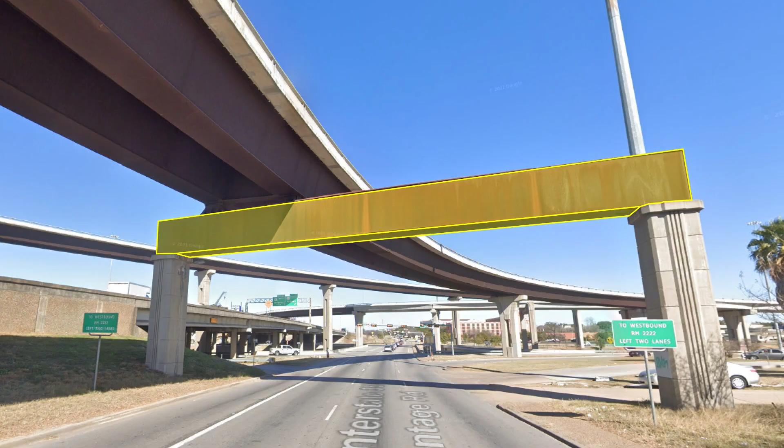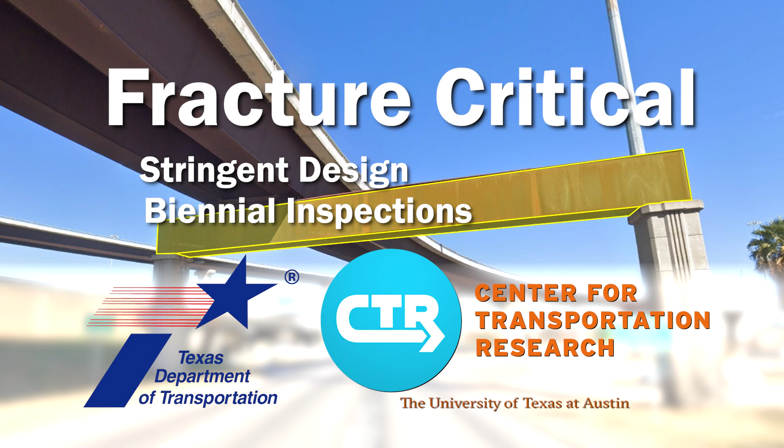Steel box straddle caps are categorized as fracture critical, meaning that they may require stringent designs and hands-on biennial inspections. Researchers at the Center for Transportation Research worked with TxDOT to develop a comprehensive design methodology to remove this fracture critical designation on the caps.

Straddle bents are supported by two columns on each side and are commonly used in congested urban environments. And steel straddle bents are fabricated by welding plates together to create a box. These types of structures are classified as non-redundant steel tension members, which require a federally mandated in-depth hands-on inspection every 2 years for the life of the structure.

Every 2 years, the state has to put a lot of money and time into investigating these. So what we were trying to do is develop details that gave us added redundancy in those systems and can then be labeled as we call them a non-fracture critical, but the term we use now is related more to whether it's a redundant member.

And that's what we were able to do in our research, is look at different details that we can use on these steel box straddle caps to try to get that redundancy in the system and thereby give a much more efficient structural system from the long-term maintenance perspective. Nationally, there's been a lot of research on non-redundant steel tension member bridges, but there was not any research on developing these types of redundant details for straddle bents.

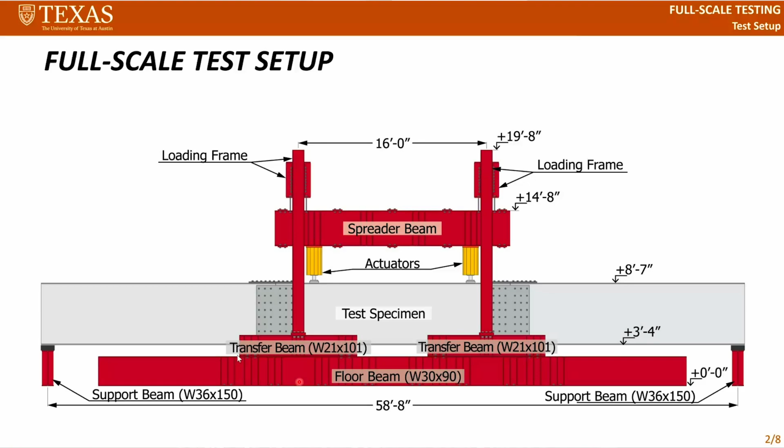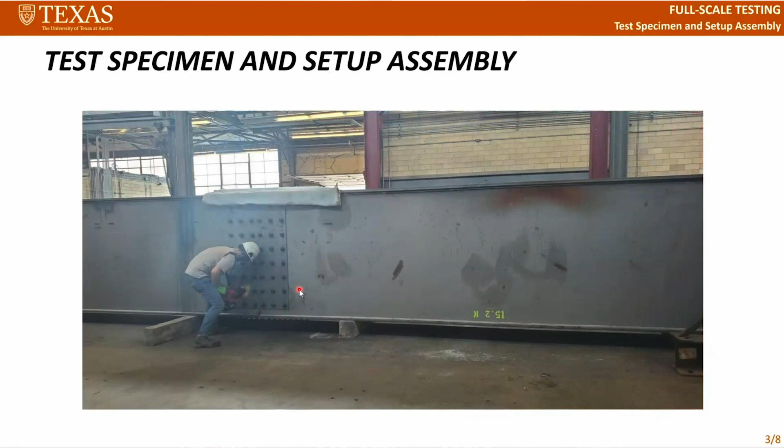These were what we call full-scale laboratory tests, and we also did parametric finite element analyses to then develop design methodologies. But the laboratory tests were somewhat unique in that they were full-scale steel box straddle caps. But we wanted to simulate a brittle fracture on these. Steel is a very ductile material, but in order to get it to behave in a brittle fashion, we can cool it down. And what we do is use liquid nitrogen to do that.

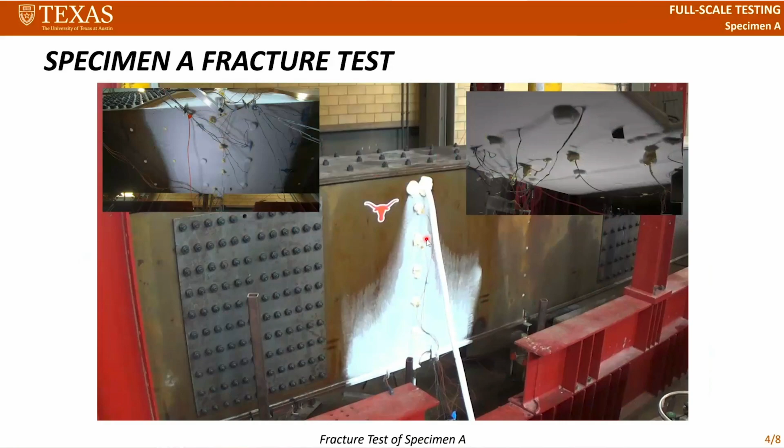So we were able to cool down the steel box caps in a region where we introduced a defect, by grinding a defect in, cycling it to grow what we call a fatigue crack. Then we cooled it down to about minus 200 degrees Fahrenheit, loaded it very quickly to initiate a brittle fracture. And then we looked at the performance of these different details and their ability then to support what we would call the design load or the redundancy load that we would have to carry in a safe fashion.

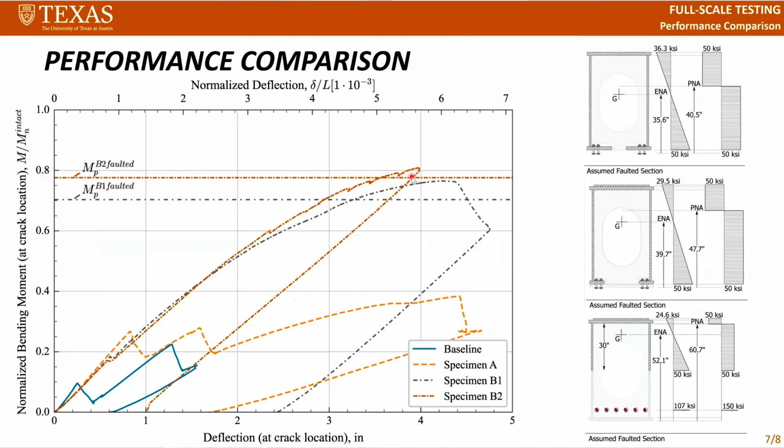Those tests then provided valuable data that allowed us to validate detailed or refined finite element models, so that we could simulate that behavior computationally and look at a much wider range of geometries. That allowed us to then develop a comprehensive design methodology so that designers can actually take this and relatively simply incorporate this into design.

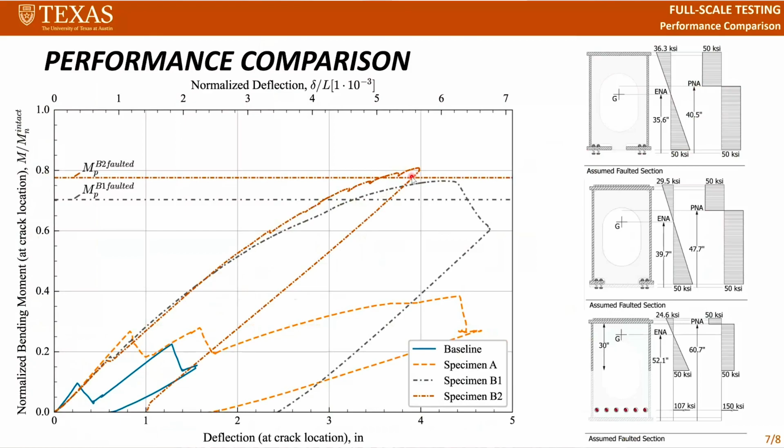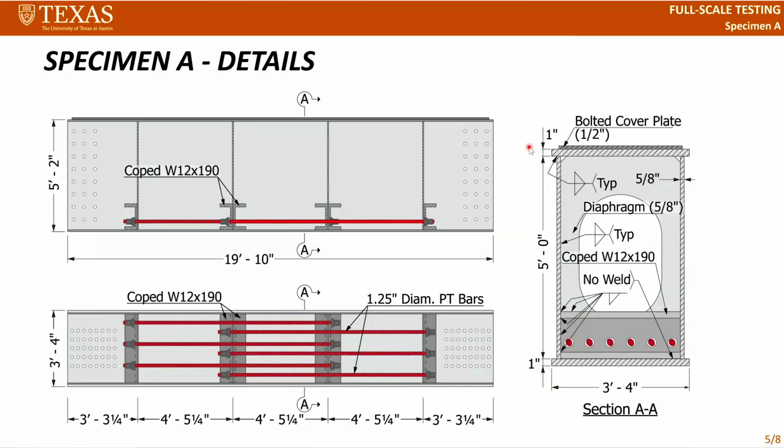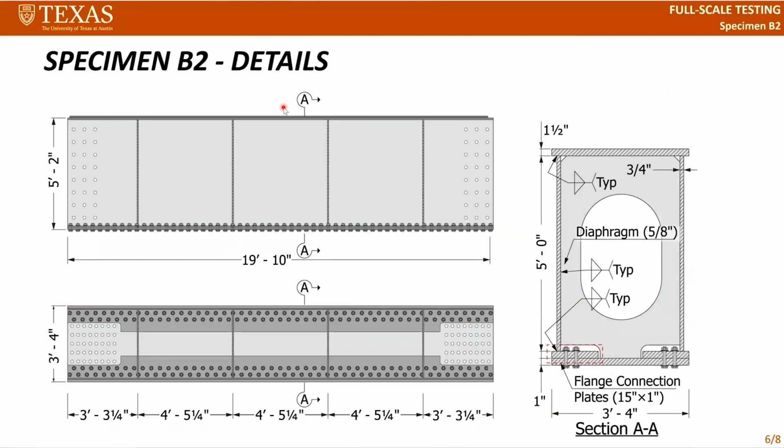I think the most important research finding came from the study of two different concepts for these steel straddle bents. One concept for the straddle bent was fabricated with post-tension bars, and the other concept was fabricated with a bolted bottom flange. This project demonstrated that if the steel straddle bent is fabricated with that bottom flange bolted to the webs, it provides sufficient capacity in the faulted condition.

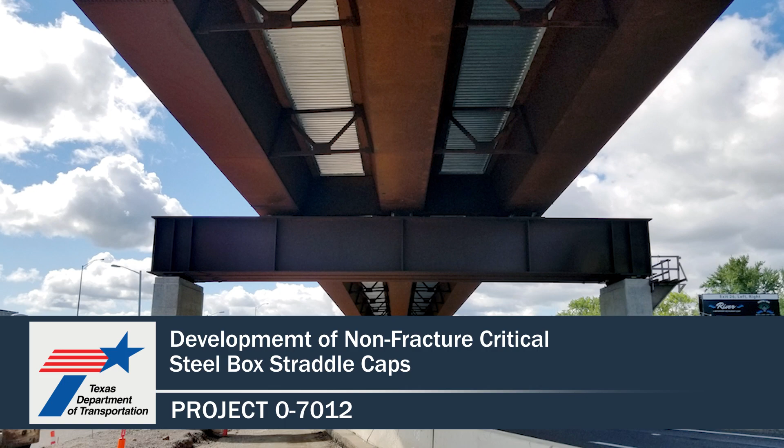So due to that bolted bottom flange connection, the simulated fracture didn't propagate through the entire member. And so this approach allows these types of structures to be designed as internally redundant, therefore eliminating that costly hands-on inspection.